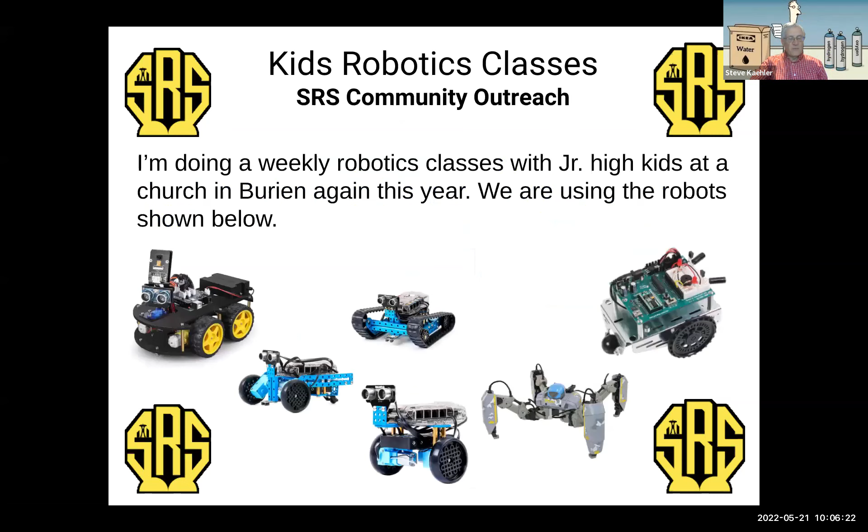Events: over the last couple of weeks there have been several. Let's see, what do they call it? DEED, Drive Electric something day. Anyway, there's events going on all over the country, and there were a number of them going on here locally. There's also some more coming up in the fall. Last week of September, I believe, is the official National Drive Electric Week. So there'll be some more stuff then. And there may also be some First Washington robotics events if you're interested in those.

Online presenters, I'm actually doing pretty good. I sent out a whole boatload of invites last night, and got through about half of my list, so I'm going to do some more of those. So we're starting to fill out the rest of this year, and then hopefully into next year.

This is what's coming up this year, and so the August meeting may be a facilitated discussion, or if a presenter actually wants that slot, I will relinquish that. But I'm kind of planning on having a presentation of some sort then. And then October on is open, and so we're planning on filling up as many of those as possible into next year.

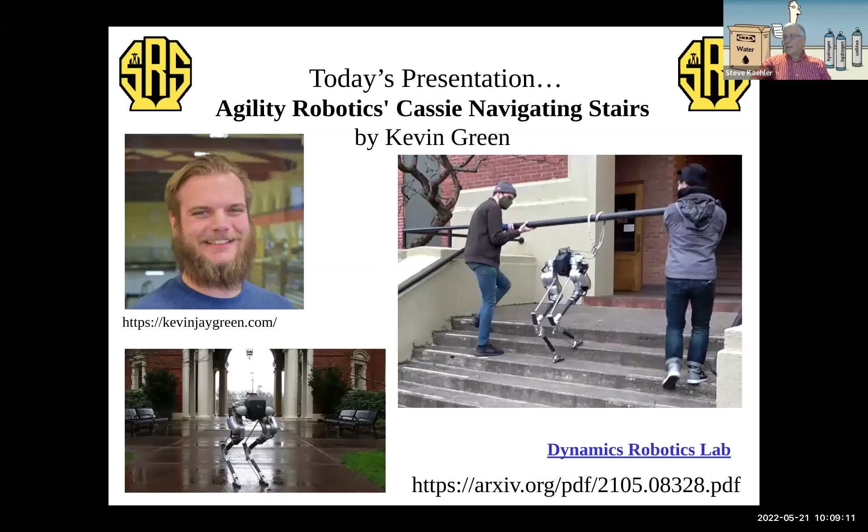Kevin Green is going to be sharing with us stuff he's been doing with walking robots, and this particular picture here, I believe, is Cassie. And there's some pretty cool stuff down there at Oregon State University. Is that right? Give me a thumbs up there, Kevin. I think so. And so we will get to those a little bit later.

Let's see. Am I seeing? Kind of curious. I'm looking for the screens to update here, and I'm not actually seeing a whole lot of activity. So I'm hoping you guys are all getting that. Yes, Steve, we're seeing the Robothon committee page. Okay, and you're hearing me okay, right? Yep. Okay. Actually, you know what I know it probably is. My wife is on a Zoom conference, a one-way thing with a ton of people downstairs at the same time. So I have a feeling that she's probably limiting my bandwidth here. Anyway, okay. Well, I will continue. Thank you so much for the feedback there.

Lloyd, would you like to share a little bit about Robothon stuff coming this year? Yep. So basically, I think we've already announced this. We will not be having an in-person event this year. We're still looking at next year. We'll see how that goes. It's kind of just play it by ear with COVID. We do have another virtual Robothon exhibition coming up, and we're shooting for August 27th from 12 p.m. to 3 p.m. This will basically be like we did before. We're going to have a collection of people presenting short presentations of whatever they would like.

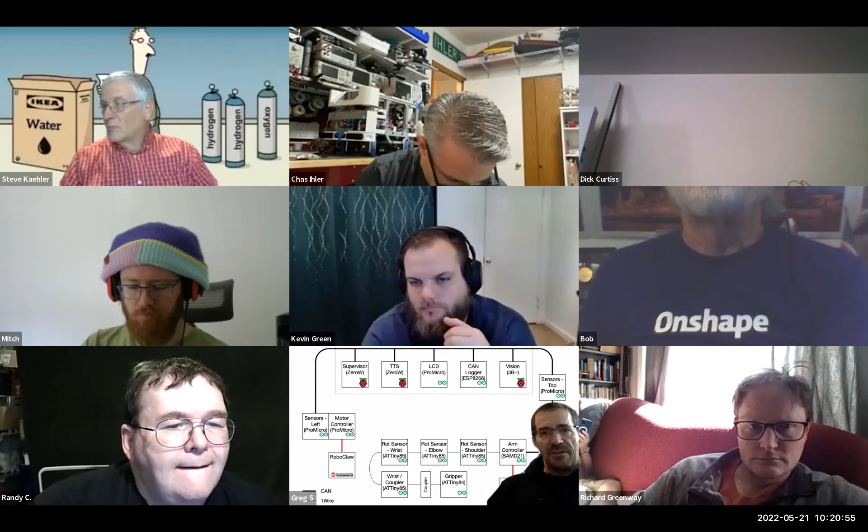Here, unmute. So I put this diagram together. This shows all of the microcomputers and microcontrollers that are in Gidget at this point, or plan to be in Gidget. Up at the top here, these are all the ones that are in the RoboBus card. Then there's others that are connected to the CAN network. And I put this together in part because I've added a few more in the arm.

So the controller for the arm is a two-board combination, one that drives the stepper motors and one that is kind of the brains of the arm. And then there's a number of boards, microcontrollers in the arm at each of the joints. There's one up at the wrist that controls a couple things, has a couple sensors on it. And then each of the end effectors, the gripper, for example, will have a controller on it.

So the fat black line is CAN. So all of those communicate over CAN. There's a couple instances where UART connections are used. And then the thin black line is Dallas one wire. That's allowing the arm controller to query the different sensors in the arm.

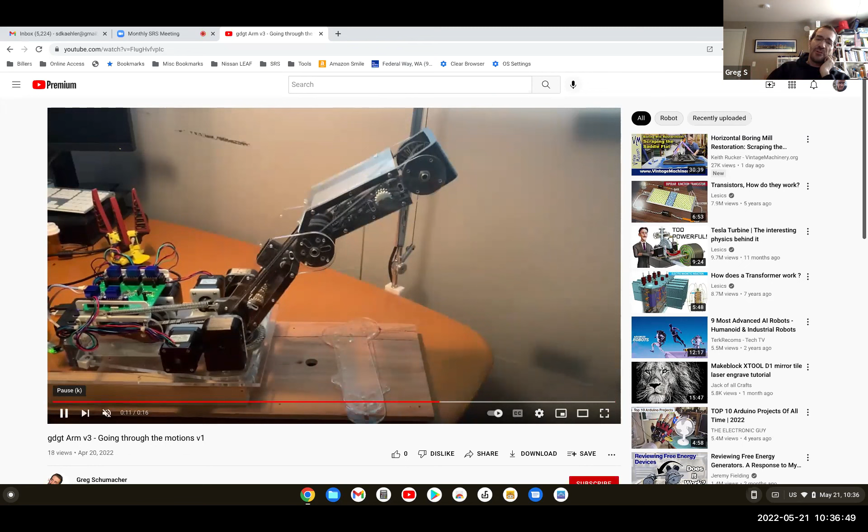Yeah. So this video is just exercising the arm, just having it go through some motions. It does have acceleration and deceleration there. And it's set up so that it calculates the motion; there's a destination angle for each of the joints. And so then it calculates the steps required by each of the motors to get there, and then determines which one's going to take the longest, and then scales the speed on all the others so that all of the motors stop at roughly the same time.

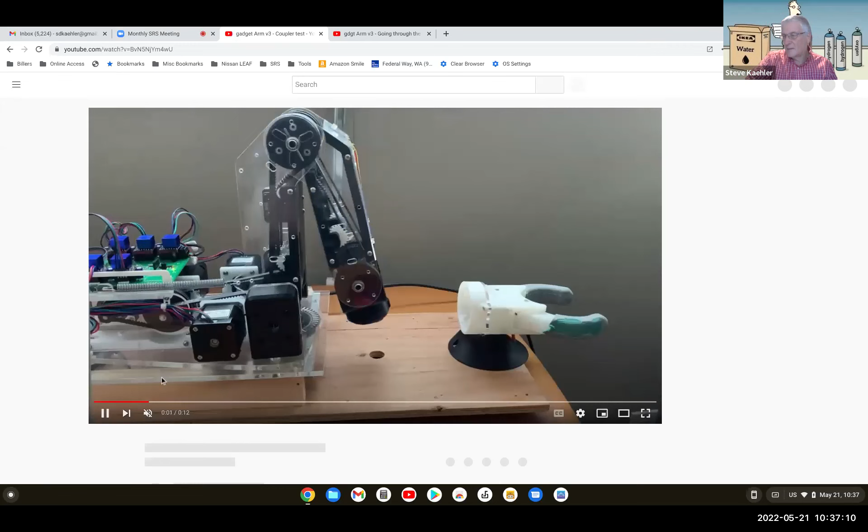Okay. And then this one. And so this one is showing it's going out, it's able to couple and pick up the tool and then detach and pull back. I cheated a little bit there in that it's not engaging the lock pin because I don't have the solenoid being driven. The solenoid wasn't hooked up to anything at that point. So I didn't try to move it around after it picked it up for fear that the gripper would fall off.

And it's got a differential wrist. I thought factoring in the rotation of the wrist was going to be a real challenge. Turned out to be very simple to factor that in to the motion calculations. Cool.

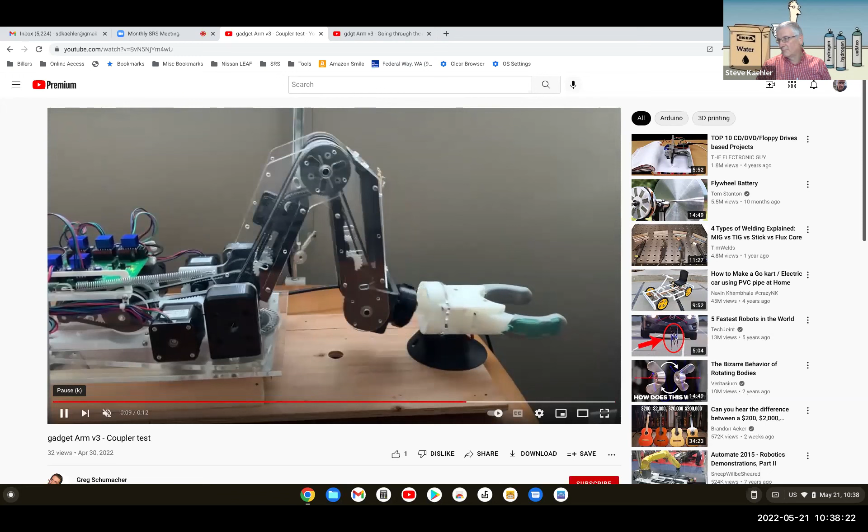Very nice. Now, all of that was done by me through trial and error, figuring out what each angle needed to be at each waypoint, right? So it moves so that the coupler is in front of the tool, then it moves it in, and then it rotates, and then it picks it up. So at each of those stops, I would, through trial and error, just keep moving the arm by commanding each joint to go to a certain number of degrees. Once I got it to the point I wanted, I'd write those degrees down, then go to the next one

and so on. And then in the code, there's a little motion queue where I'm able to put in, okay, go to these degrees, and then go to these degrees and so on. Ultimately, that's not how the robot's going to be moving it, but that was where I was at that point. Okay. All right. Thank you, Greg. Yep.

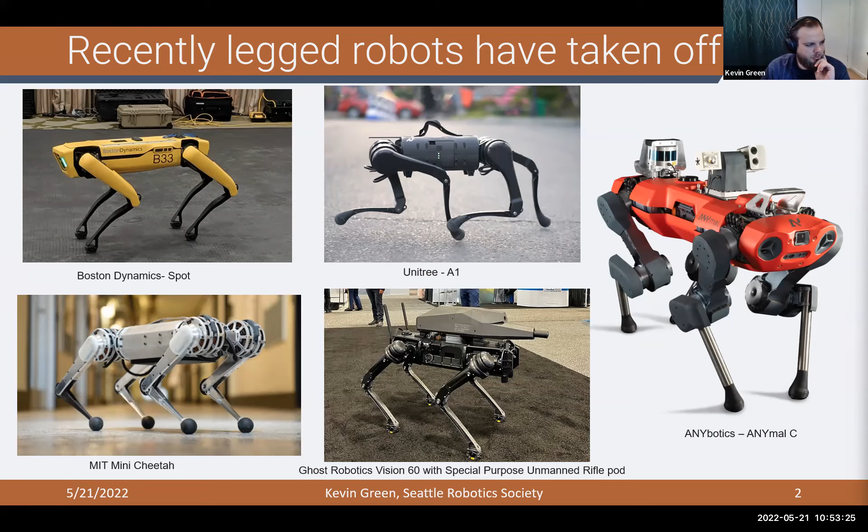So there's a lot of stuff in the quadrupeds, and those are really getting out in the real world, which is really exciting. We also have quite a few dynamic bipeds that are out there now. So starting on the left, we got Apptronik. That's a University of Texas startup, was where they came out of.

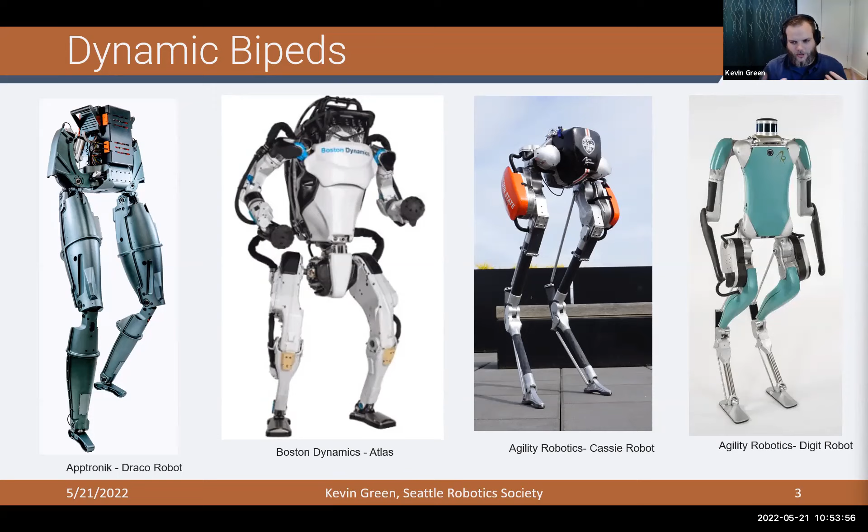Boston Dynamics Atlas is sort of one of the most well-known, between dancing and just absolutely athletic feats. And then there's the two Agility Robotics. So in the middle, that's the Cassie robot. That's actually ours. That's the one I work with quite a bit. And then there's sort of the evolution of it, the Digit robot, which is basically just the Cassie legs with upper bodies and perception stacks.

So this is backing up. Legs are really hard. Why would we even want to do this, right? Wheels are much, much easier. They're much, much more efficient, right? Cars go way farther on way less energy. And the idea is really that we have rough terrain, or we have stairs, or we design the entire world around bipedal locomotion, right? The entire world is designed so humans can get around. So it's really natural. If we can do that, it would make a lot of sense.

And they can be pretty efficient, right? Humans are actually quite energy efficient in the large scheme of things. And when you do locomotion well, it can be quite efficient. Granted, bicycles would blow humans out of the water, but legs are actually pretty good. And the other thing, they're just awesome. They are really cool. I feel like it's one of the tenets of really awesome robots moving around the world fluidly, and legs really fit in there in a strong way.

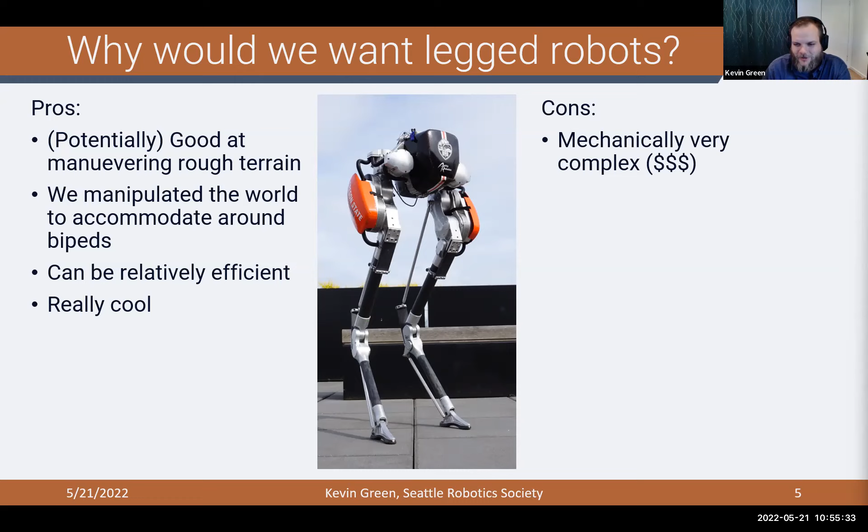But there are a lot of problems with them, which is why you don't see them everywhere. They're really complex, and that means they are expensive. There aren't really cheap, high-performance legged robots, at least maybe not yet. They're much more difficult to plan and control compared to a wheel or a tread robot. And then you have this problem that when you're moving well, you are unstable. If you stop, you're falling over. You need to actively be balancing as you move, even with quadrupeds as they get to their more efficient and agile gaits.

And then you also do have a lower top speed. That is a limitation, right? Wheeled robots, you can get up to highway speeds, or quadcopters, you see them accelerating to 200 kilometers an hour out of nowhere with some of these really high speed ones. But legged robots, especially general purpose ones, 10 miles an hour would be amazing, that's getting really pretty quick.

So, and the other thing is... I have a question for you, Kevin. The direction that the knees bend, forward versus backward, are you going to address that later on? Yeah. In the first main section, I'm going to go through the whole hardware and software stacks and talk a bit about the kinematics and why they're done that way.

Okay, thank you. And the other is that honestly, this is a bigger thing as these companies try to deploy these. The social interaction with these is very different compared to a self-driving car or one of these 6-wheel delivery robots. I think it's a really interesting area that we haven't looked into quite enough, but it's going to be super important in the coming 5 years or so.

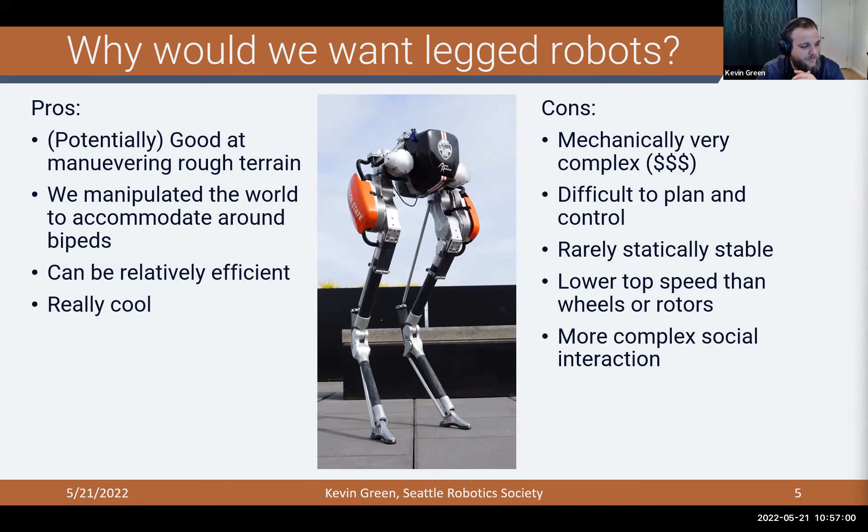So the rough outline I want to talk about today, I might skip over some of these to get to the more exciting parts. Starting with going over the hardware and software stacks we use, talk a bit about reinforcement learning. I have 3 examples of different reinforcement learning things we've done. The very first one we did, walking like a spring, and then how we actually scaled stairs with vision. And then I have 2 or 3 really interesting failure stories of bugs or issues we ran into. And with one of them I'll try to give you guys a brain teaser.

So talking a bit about the hardware and software, I think this group will find this pretty interesting. Yeah, so here's our Cassie robot. So it is a biped, right? You can see that. And there are 10 motors. And here's the leg mechanism.

So it's actually this closed kinematic loop. So if you think about it, it really is a parallel 4-bar linkage is what's going on with this leg mechanism. So I can label real quick the motors. So you have in the sagittal plane, starting from, let's go the bottom up. Where's my pointer?

Here we go. So down here, there's a linkage here that drives the foot, and that allows us to shift the center of pressure back and forth. So we have a little motor there. These are totally passive. There are no motors in this area. And then we have a knee motor here. So we call this the knee, actually.

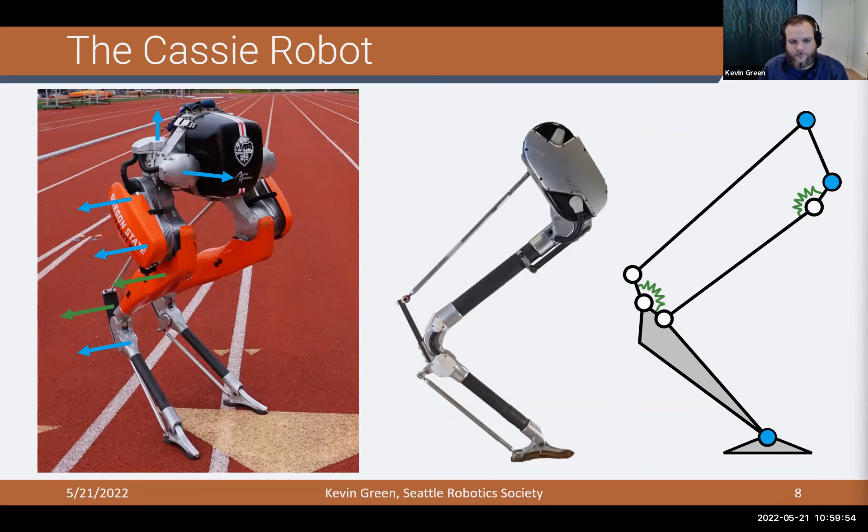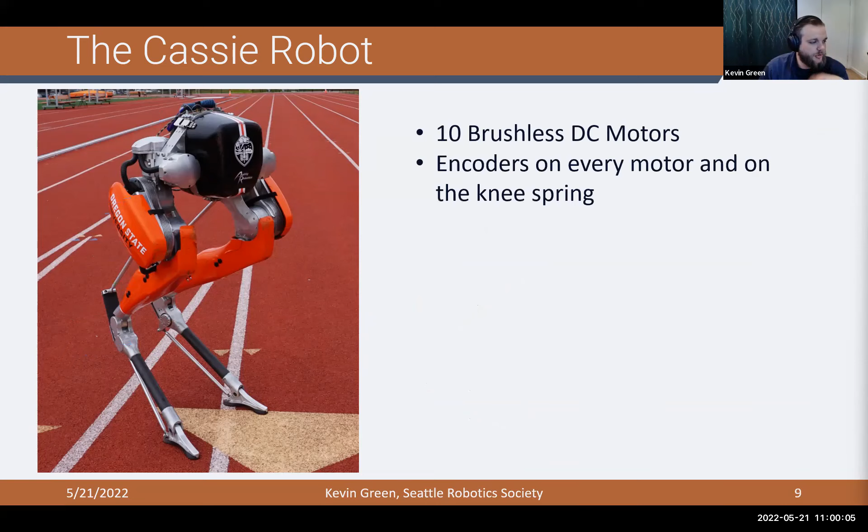Yeah, those joints. And so there's 10 brushless DC motors through this. We have encoders on each of the motors and on the knee spring, along with an IMU on the pelvis. It's powered by a custom lithium-ion battery pack running at 48 volts. And that gives us enough power to do over an hour of pretty high-speed walking on this robot.

Total weight, roughly 30 kilograms or 60 to 70 pounds. And we can get it up to about 4 meters per second, which is the equivalent of running a sub 7-minute mile if you did that for a mile continuously. And when you're running, you draw between about 50 and 100 watts.

And one thing I didn't have on notes, but the transmission designs are actually pretty interesting, is that they're really, really low gear ratios. I think that's a really important part of the mechanics of our robot. So the ones on the knee and hip here, these axes, they are only 16-to-1 gear reductions. And the idea of that is that you really want to be back drivable so that when you run across a step up or a step down or an impact with the ground, you're not going to have this giant amount of inertia and this big shock on your leg as if you had a really big gear ratio.

Yeah, see a comment there. And actually the name Cassie, it comes from cassowary, which is kind of like an ostrich or an emu or like a chicken leg, because it was designed based on sort of math of inertia properties, but it ended up being almost identical to the topology of what you see in these large flightless birds.

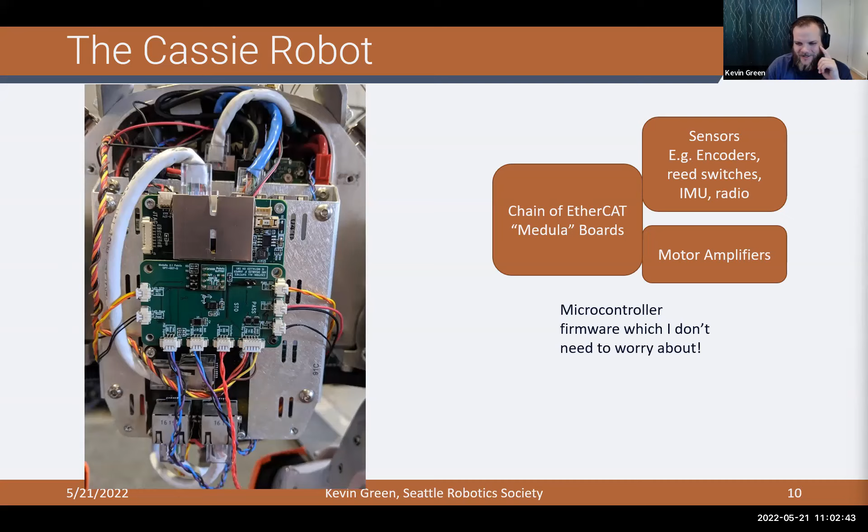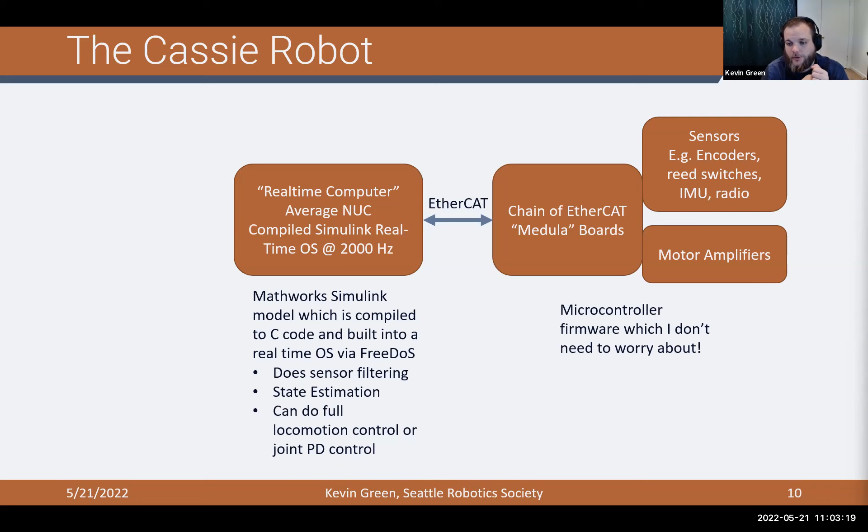Then that connects back to a real-time computer that's running a compiled Simulink Real-Time OS image. So that's a specially designed operating system to make sure it runs at 2000 Hertz, locked solid. So that does basic sensor filtering and some state estimation to give us a good estimate of the overall robot pose. And it can do some locomotion control, but for our work, we generally just have it run joint proportional-derivative (PD) controllers on each joint. And that gives us a really clean interface for what we want to do.

And you go a little bit higher up, then we have a second computer. So this is all on the robot. There's a second computer, also one of these Intel NUC-size boards, and it's running just an off-the-shelf, GUI-less Debian. So just like Ubuntu, basically. And from that, just whatever we want to run. For a lot of our learned stuff, we use just a Python script. And it truly is a Python script with some pretty efficient libraries. And in some earlier work, we were running multi-threaded C++, some more intense optimization-based things.

So yeah, the communication protocol on the Ethernet. This is just custom UDP messages. Pretty standard. So TCP/IP is one option. UDP is just a much simpler one. And when it's just going from one computer to another, that gets us a lot of the way there between the real-time and the user computer.

And so EtherCAT is its own protocol. It really is a lot like CAN, but it uses a lot of the wrappers of Ethernet and some of the other protocols. It's very common, I think, in industrial settings. It's a little weird to see it in this context, just because usually you connect whole arms to each other for a whole assembly line. That's where it's most commonly used. But it has some really nice properties and really, really low latency when it goes from one board to the next, and each board will populate its data on that message structure. It's really quite nice.

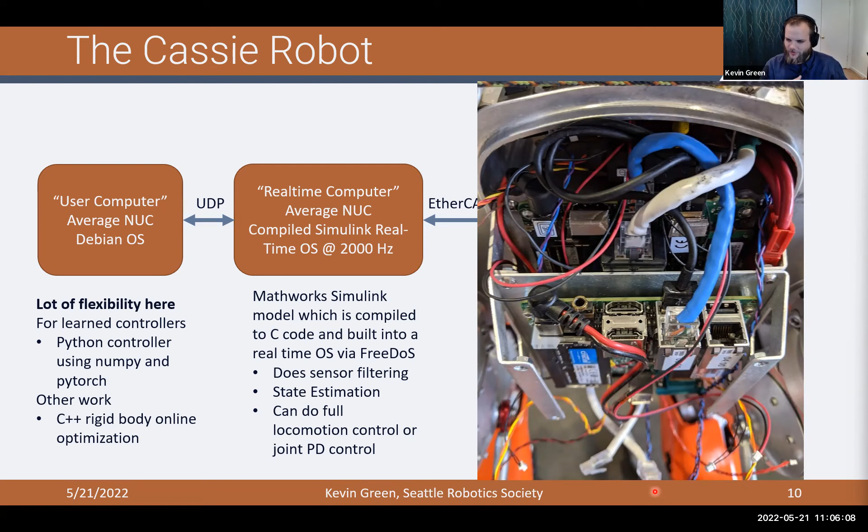But we have some more sophisticated systems above it that do the accounting for how you fail to get to where you want to go. So it has a lot to do with that internal state, because then we'd have to consider how wound up my integrator is. But great question.

And then the one other thing, we have an offline software stack. Our whole trick for what we do is we do a lot of simulation and we train a lot of controllers in simulation. So we need a really high-fidelity simulator that's quite efficient. And what we've come to use is this software called MuJoCo. It stands for Multi-Joint dynamics with Contact. And this is totally free now. It used to be paid software that was pretty expensive, which was really pretty obnoxious.

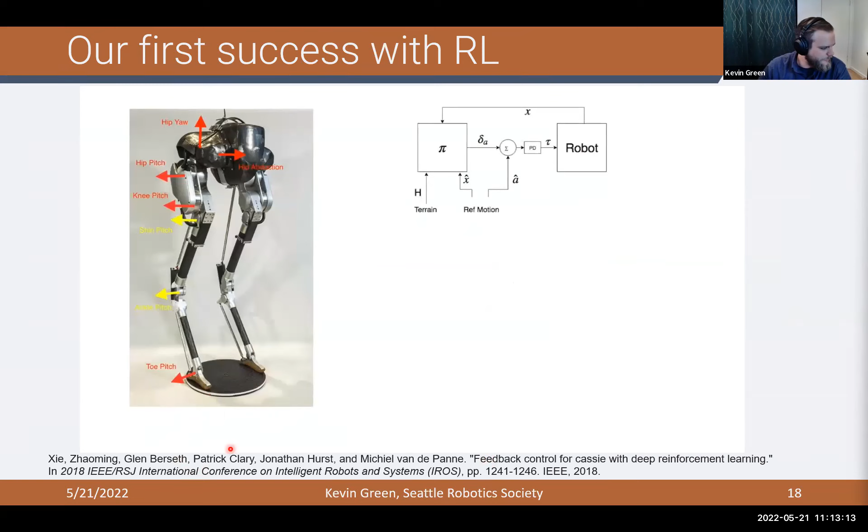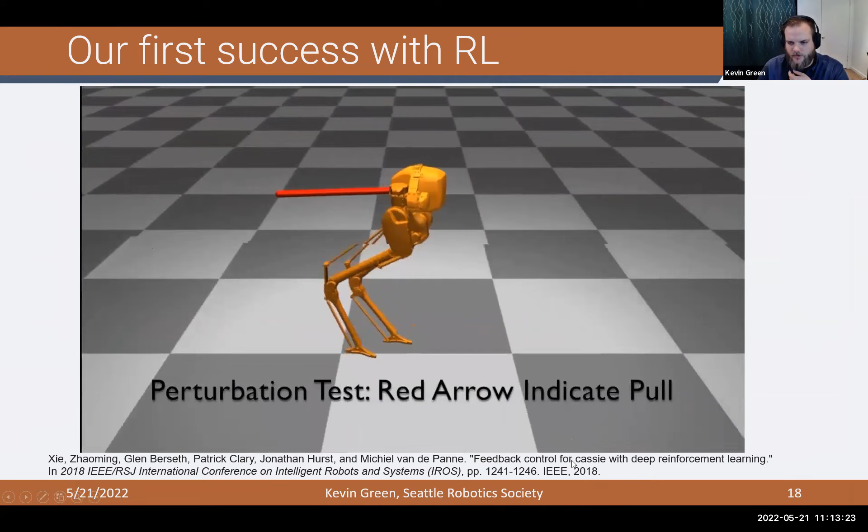So let's look a little bit at how this actually worked the first time we got this to run. So this is some work that was a little before my time, a collaboration between University of British Columbia and Oregon State. And let's see, I might jump around this video. That was good. So the whole idea of this is that we had some reference motions of the robot walking, and we used that as a big component of the reward to tell it how it should walk.

And it was able to walk on varying ground. So I was talking about, you can't expect the ground is flat because you don't have external perception. You have to be able to do well on average. So the ground here in this case, it's sort of bumps. There they messed around with some sensors, but it did pretty well.

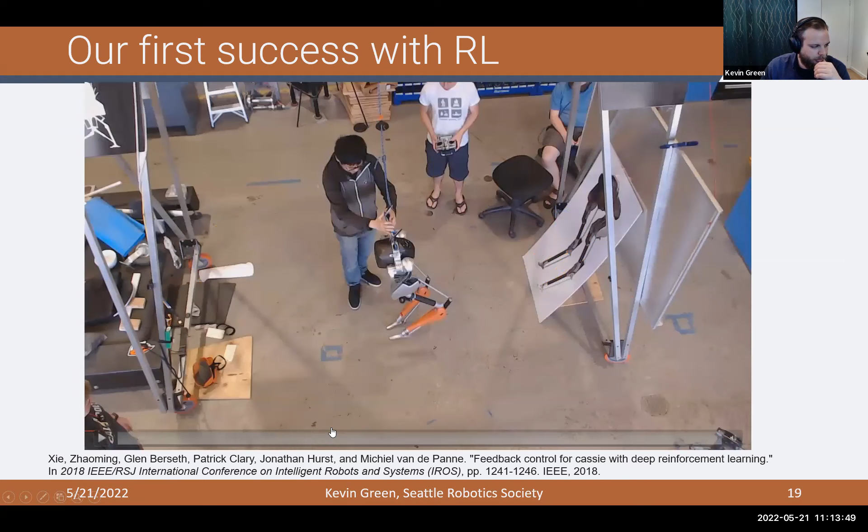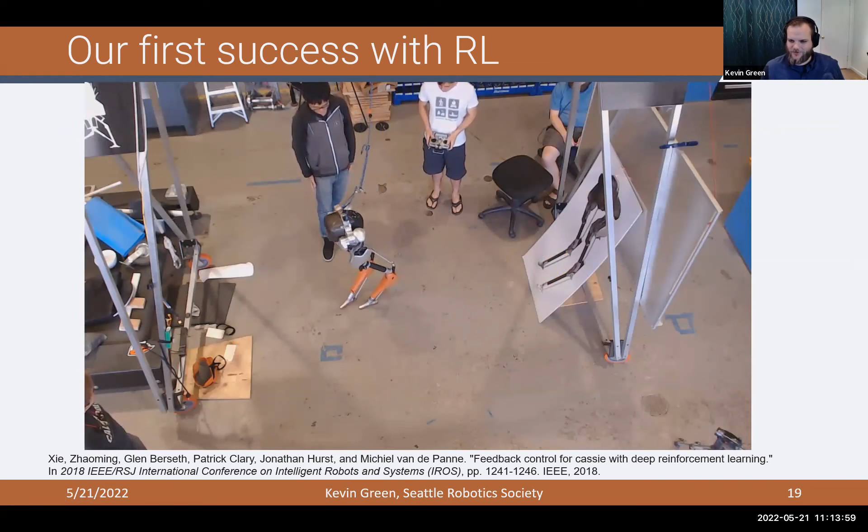But the really interesting thing was that it actually was able to work on hardware. You know, it doesn't look amazing, but at this point, creating a neural network that made the thing balance was the first time we had ever seen anything like this. So it was super exciting.

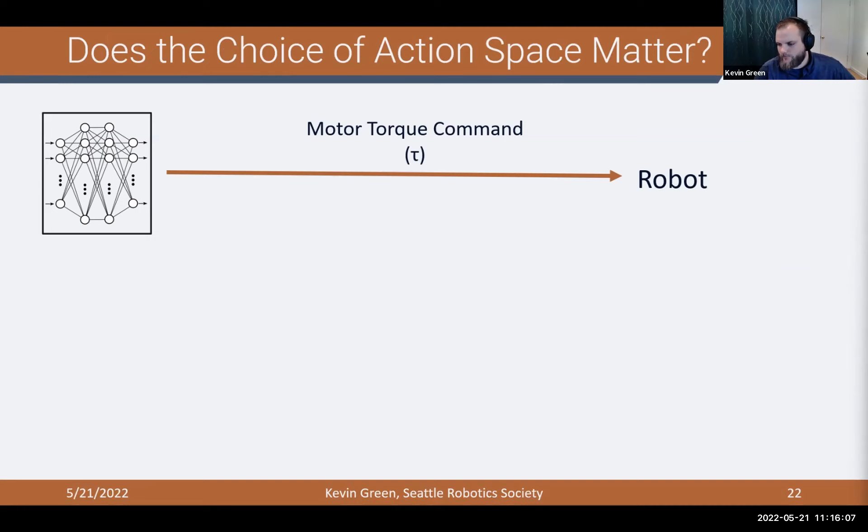Let's see. Yeah, answer some quick questions. So for varying environments, if it can't sense the environment, it can only optimize to the average, or it's sort of like a weighted average of what it sees, so you can manipulate it a little. But if it can't sense it, it has to just think about the entire average of what it sees during training. And it's able to balance while standing still. With how we parameterize some of these learned controllers, they always step because we have clocks that tell it to keep taking footsteps. Yeah. So the other thing we talked about, why PD as opposed to PID, but the real question is, why not just use motor torque directly, right?

Because you think you have a PD controller in the middle, and if your neural network's just outputting some nonsense, it could just skip that and output the motor torque directly, right? You can always invert the PD controller if you know the state. So you could do it. And the real reasoning is there's two real things I think that matter quite a bit.

One is that you run these at different rates. So the PD controller itself, we can run them at 2000 Hertz, which is basically continuous for all sorts of real world situations. But we can run our neural network much, much slower. So 40 Hertz torque control, it's going to be ugly. That would not look very good. But updating the position commands for PD control at 40 Hertz is actually somewhat reasonable.

And the other thing is, if you imagine what would a constant command look like, because a constant thing is easier to learn than a super varying reactive one. A constant PD command is going to be roughly stable, and you can get a lot of different locations of, say, a single joint with a constant position command. If you give it a constant torque command, you're probably going to run into a joint limit if you leave it for long enough, because it's just going to diverge. If it's not strong enough to hold up the weight, it'll fall down. If it's too strong, it'll run into its other limit.

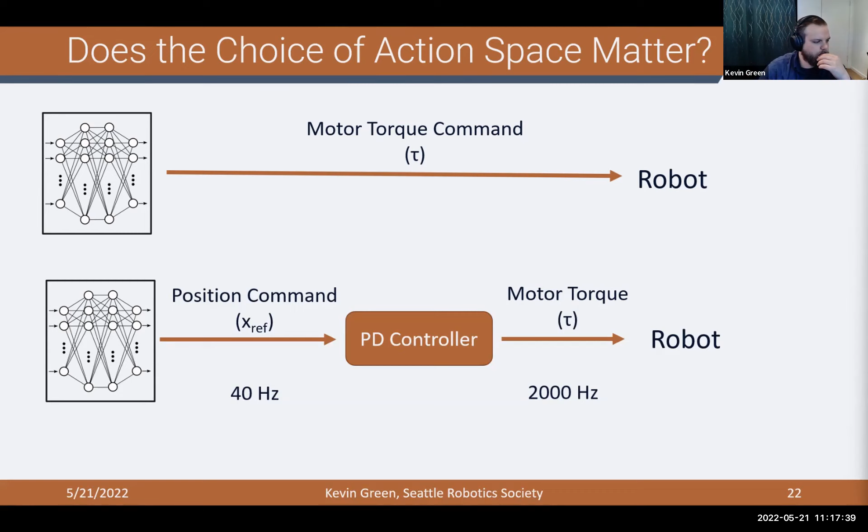Because your legs apply forces to the ground, and the sum of those forces will tell you how your center of mass moves. And so if we think a lot about what should the center of mass do, we can not worry about all the complexities of our leg mechanics within reason, and that's a really compact way of describing a gait. And in some more classic legged locomotion things, you can model how humans walk pretty accurately with the center of mass, so a mass and a spring.

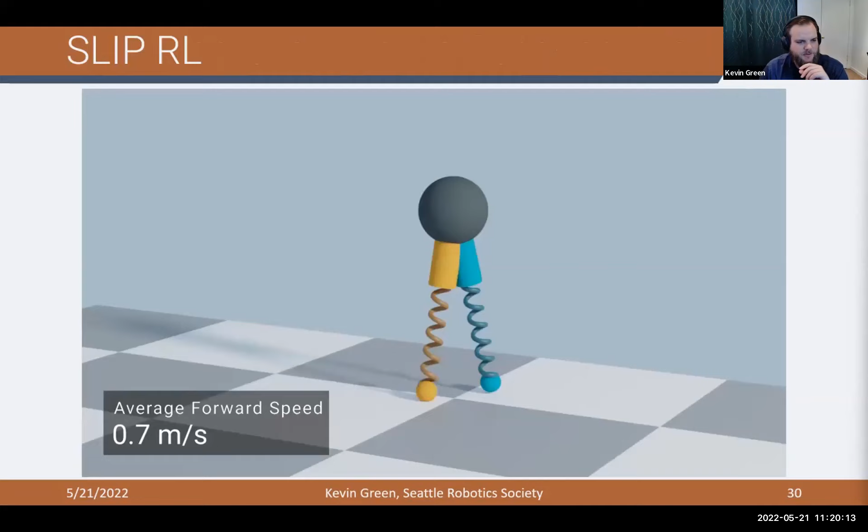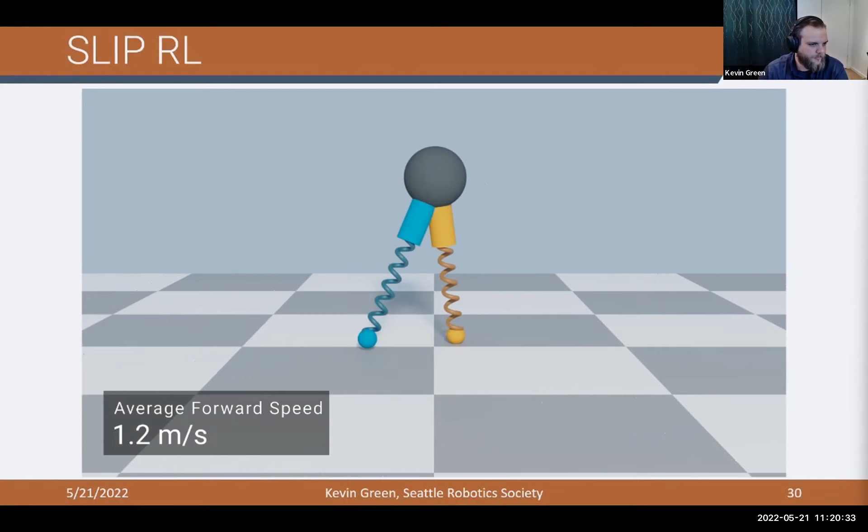So what we thought to do is, what if we optimized walking motions, just nominal steady state walking at a bunch of different speeds for this sort of model, and then use that as the reference trajectory instead of some arbitrary full order one for the robot. And this actually worked really well.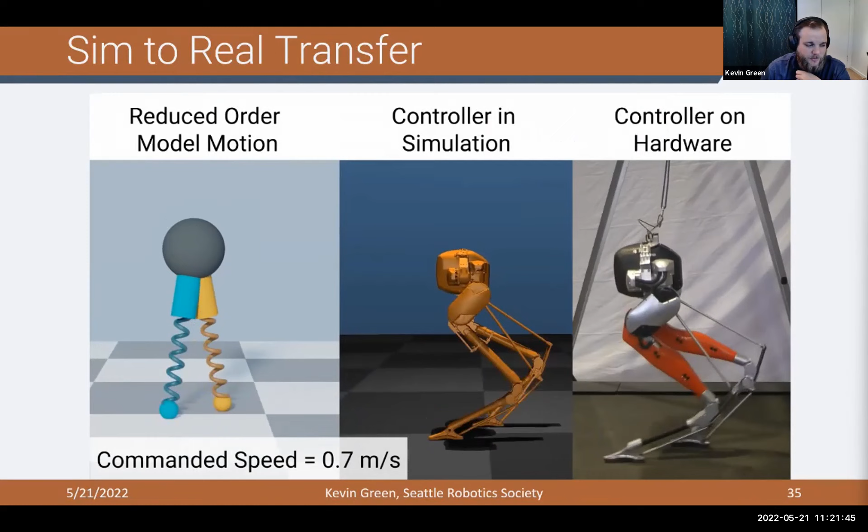And I think this is the part that really was saying to me, if you line up the reduced order model on the left, the simulated controller in the middle, and the real one on the right, we're getting a lot of that motion and the properties of the motion transferring. The body is oscillating side to side, up and down in a very similar way. Legs are moving in very similar ways. So we're definitely getting a lot of those dynamics carrying through.

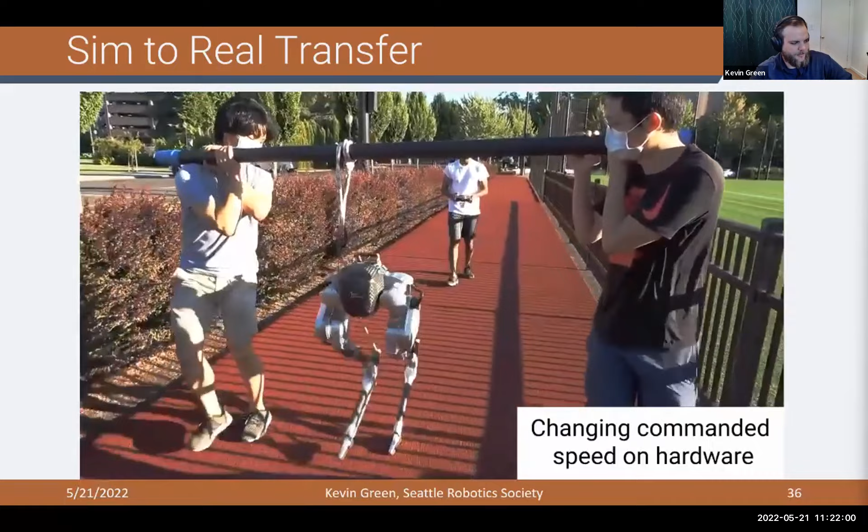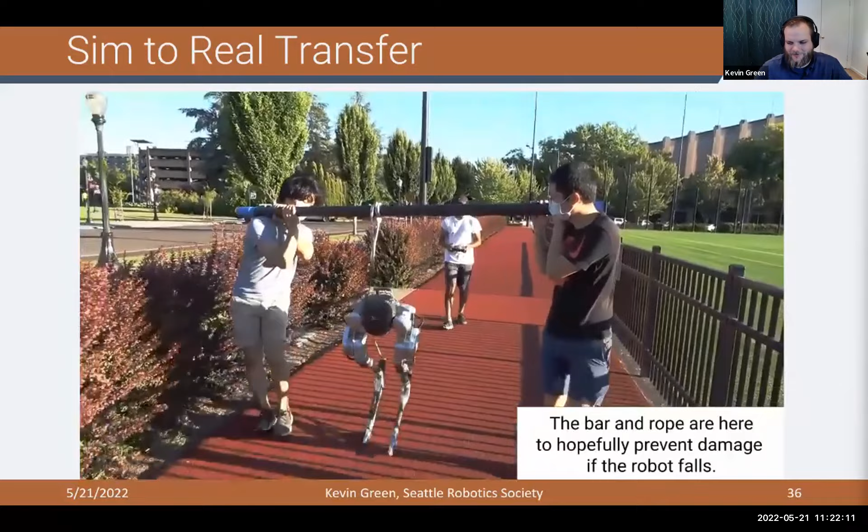And we can do the speed changes on hardware. Speeding up. So here, the shoulder poles in case it falls, so we don't absolutely destroy the robot, because even though it's pretty nice hardware and we have funding, it really slows you down when you blow up a motor or crack something. Full speed. Slowing down.

Now I want to talk a little bit about how we walk up and down stairs. So this is work led by Jonah Siekmann, who now works for Agility Robotics, along with John Warila. It's a leg day for the robot, arm day for the handlers. If you try to catch the robot when it falls, you'll definitely get an arm workout, because trying to grab 30 kilograms as it's falling over is a little bit of weight there for you.

And so what we thought is, I'm not going to go running up to stairs and start climbing them without looking at them at all. So that's kind of ridiculous to expect our robot to do that, right? So we tried to think, what's the smallest amount of information we can give this robot? Full RGB cameras, that's so much data, and big neural networks to deal with it. Let's go simple. Let's pretend we have a LiDAR or a set of time of flight sensors, and let's say we just have 6 of them fixed to the pelvis. We think that should be enough information to infer the shape of the stairs if you know they're going to be stairs. So we built that out.

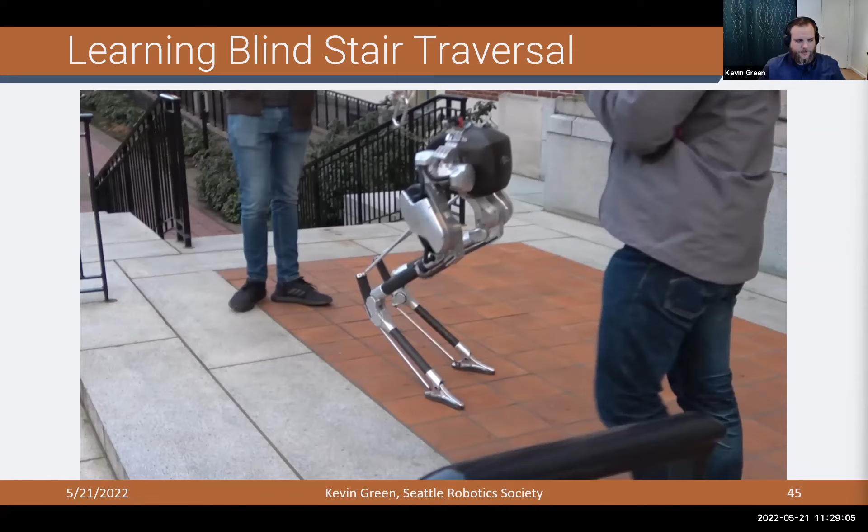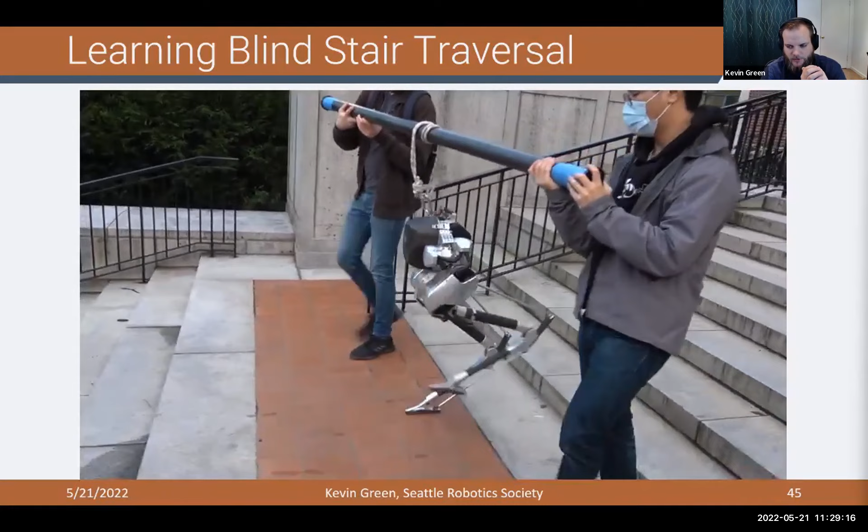So once again, no cameras, no perception at all. You have a person with a controller that's giving it velocity commands. So it says go forward at so-and-so speed, turn at so-and-so degrees per second. I'm not sure if these have lateral walking too, but some. And yeah, that's an important key point. Because it can't see the stairs, it has no way of actually lining up one foot per stair.

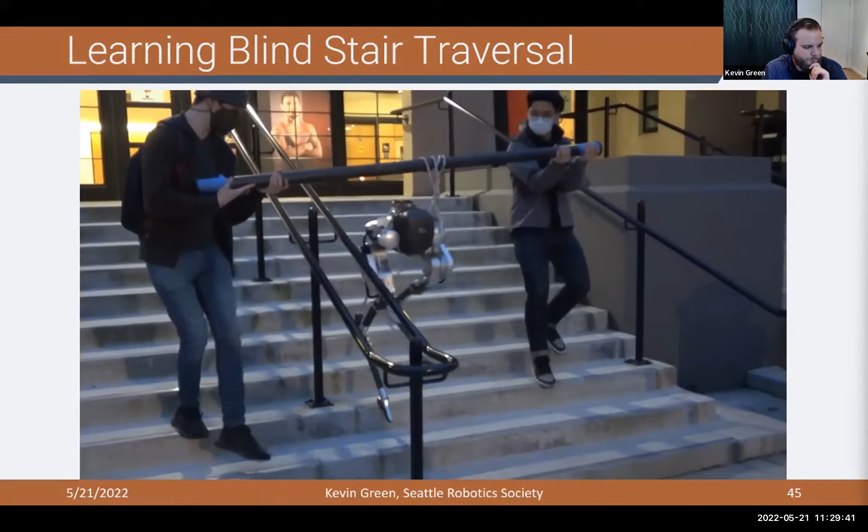So we're gonna see it a bit here. There it kind of slipped. And coming down, it's about to skip a couple stairs, just because there's no way of lining up. And yeah, it did step back. And I think I have a slow motion one right after this.

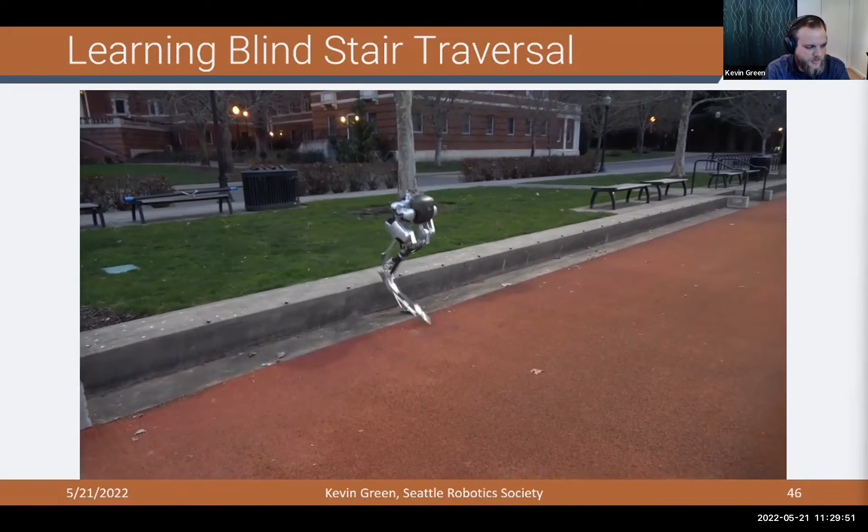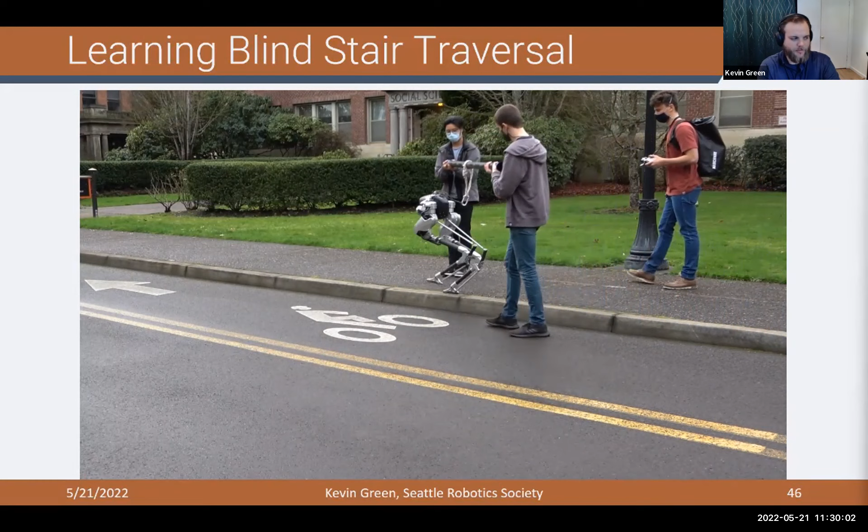And just because it's in simulation, and if it falls over in simulation, it's zero reward, it's really bad. It can learn to do things like catch itself, go back down the stairs. It'll trade off going-forward reward with staying upright. And it's really amazing, these sort of emergent behaviors just from working a lot in simulation.

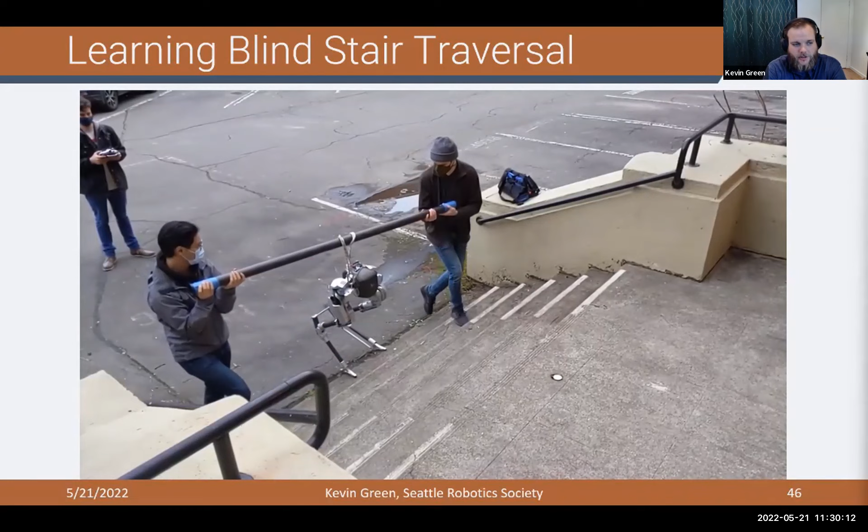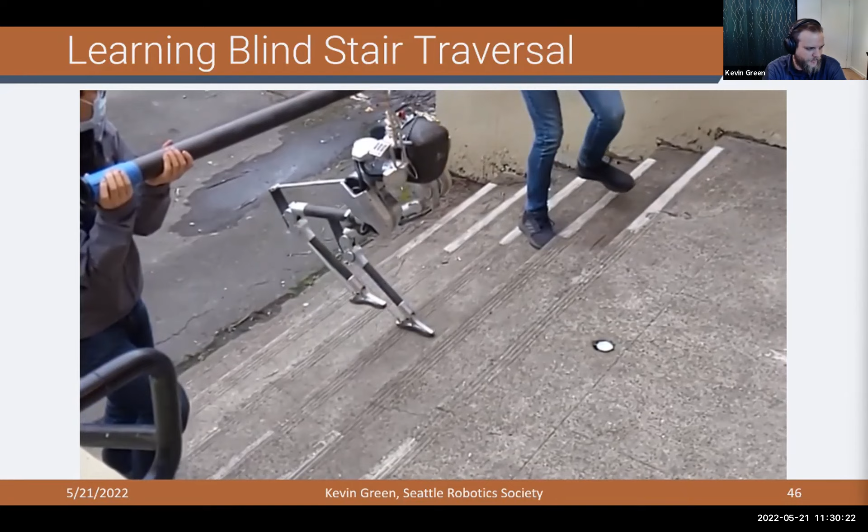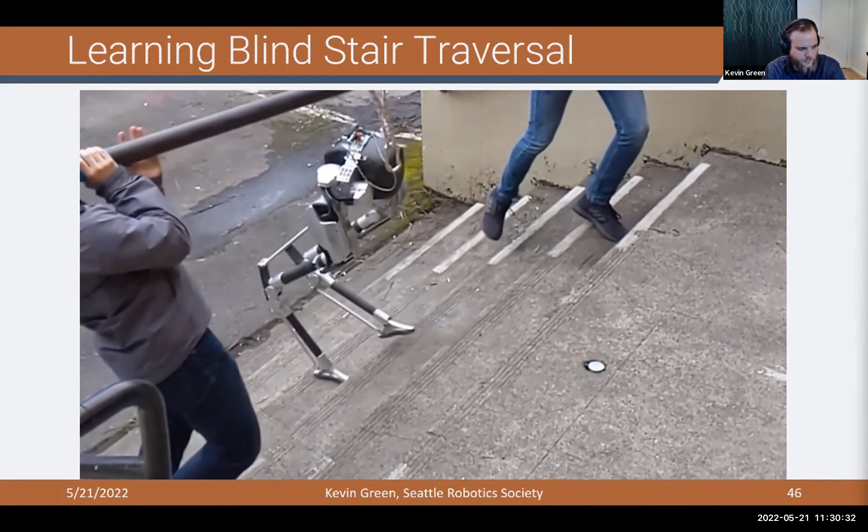So here's a really good one for the stepping backwards. So it's stepping up, gets one foot, great, one foot, great. That one, real solid. This one, it only gets to the front of the toe right there. And it tries to apply heel torque, doesn't get anything. It's not on the ground. So it steps backwards really competently, honestly. Gets its center of mass back ahead of the feet, gets that momentum going forward, and gets the rest of the way back up.

And so all of that, deciding which step to step on, is fully emergent of our neural networks, which was really pretty amazing to us to see. But one interesting question then, going back to that leg strategy, is it doing that? Is it doing this sort of leg swing behavior? And we found it actually is.

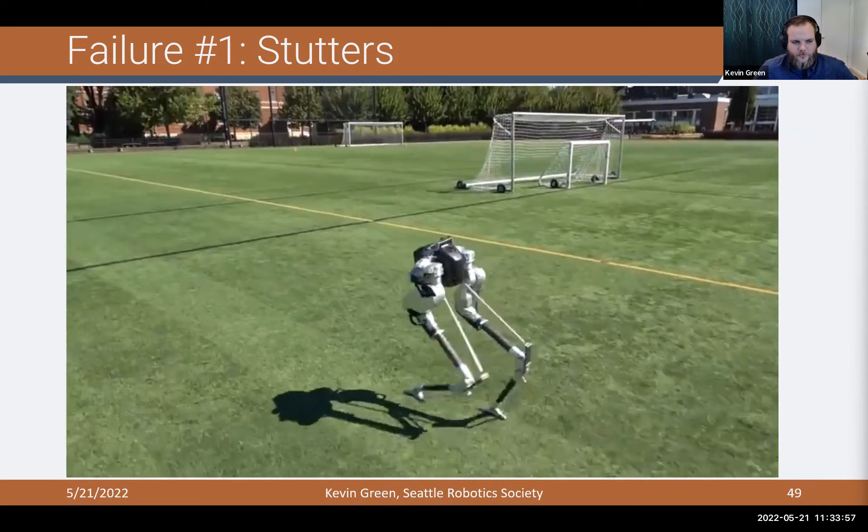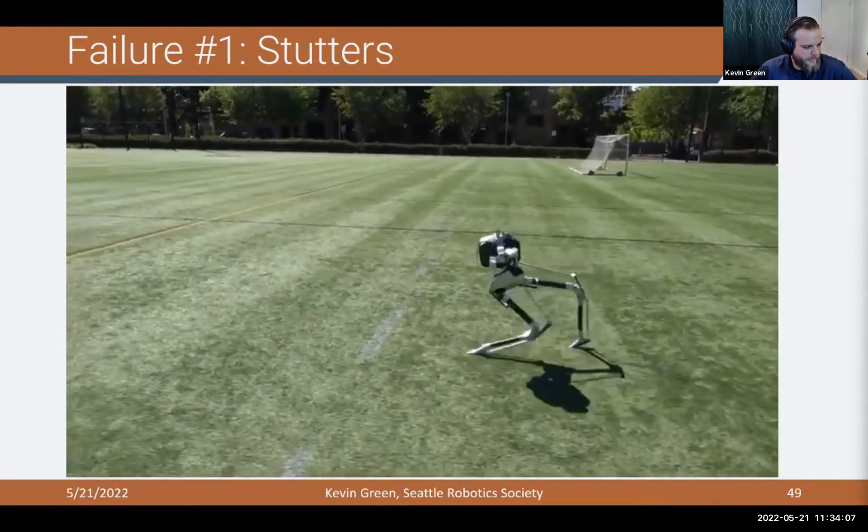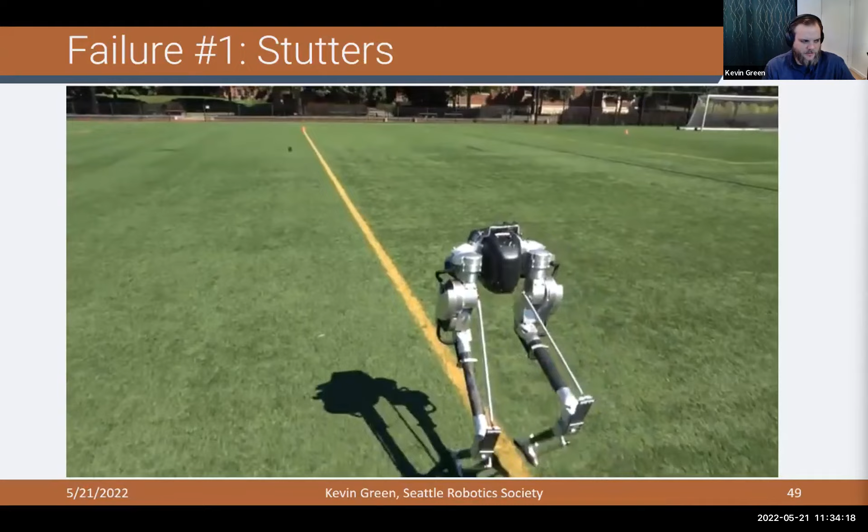Okay, so we're taking our robot out, just running it around, trying to get higher speeds, and we notice these stutters. So there'll be some slow motion of it right here, I believe, where it's running along, and it just pauses for a second, and it keeps going. And these get worse over time, so the longer we run it, the worse these get until it eventually will always fall over. So it starts off great, you get them, they're pretty evenly spaced. Okay, so we got a guess, not quite.

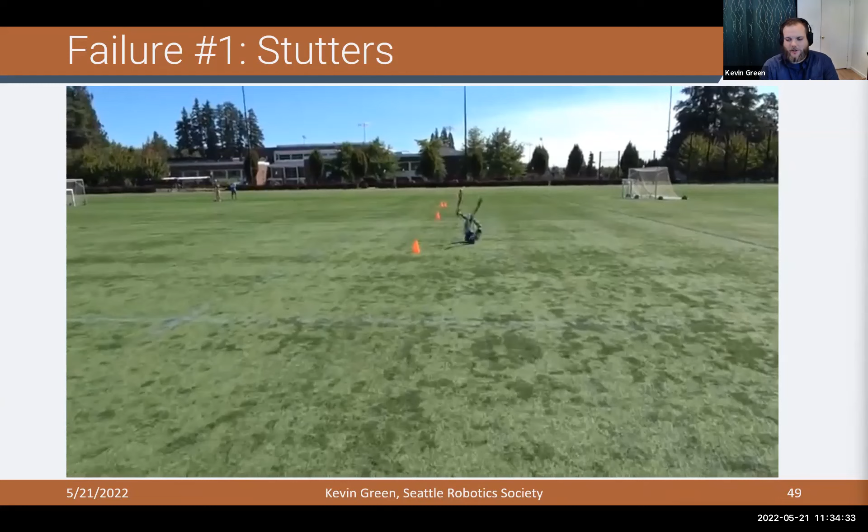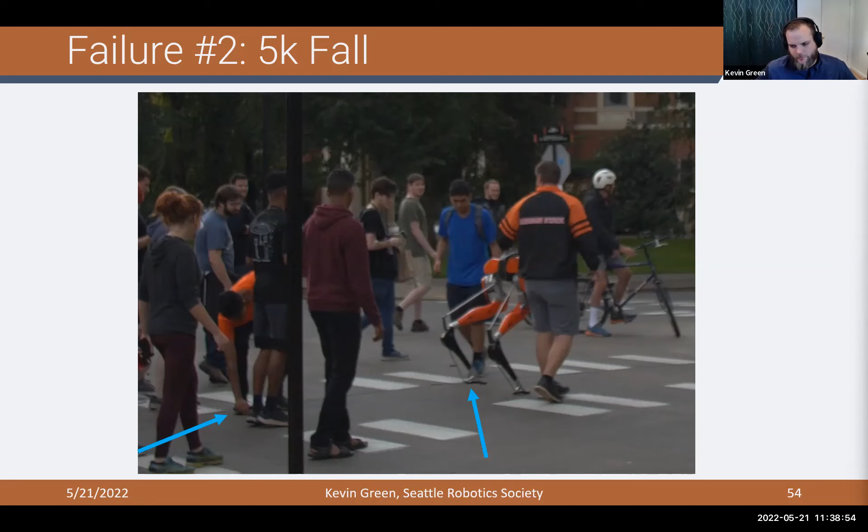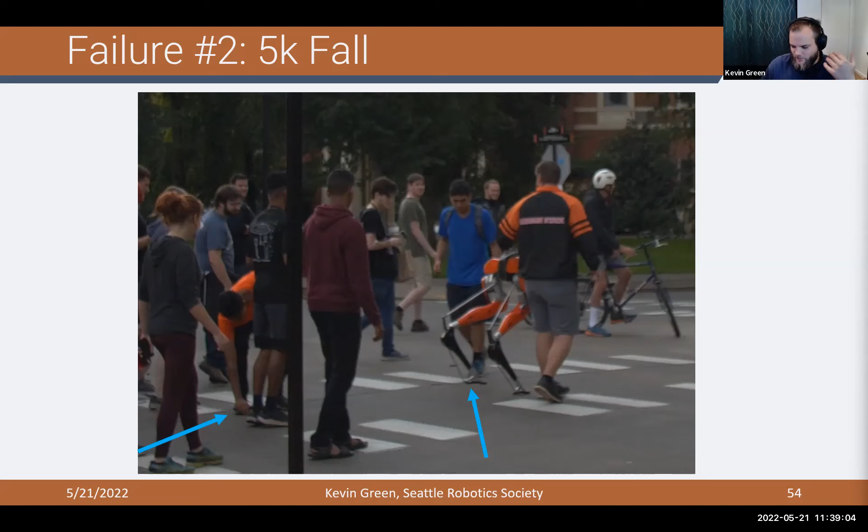We tried to shut it off, restarted it, nothing. Couldn't get any signs of life. You know, it beeped or whatever, but it wouldn't actually post. So we took it back to the lab and we're like, what the heck? We started tearing things apart, part by part, and we found the failure. So this is inside one of those NUCs. And if you see in there something that really doesn't belong, let me switch back from video to slightly better.

So if you look in there, we have a nut that fell onto the RAM module. And so this is a nut that was holding in a fan. And the lesson here is use Nyloc. It'll save you so much pain in the end.

And the amazing thing is the computer was absolutely fine. I don't know how, very rarely in my experience are you able to short pins and get away with it, but we were able to pull it off. I put it back on the test bench, ran a bunch of benchmarks, and it worked just fine. So count my lucky stars on that.

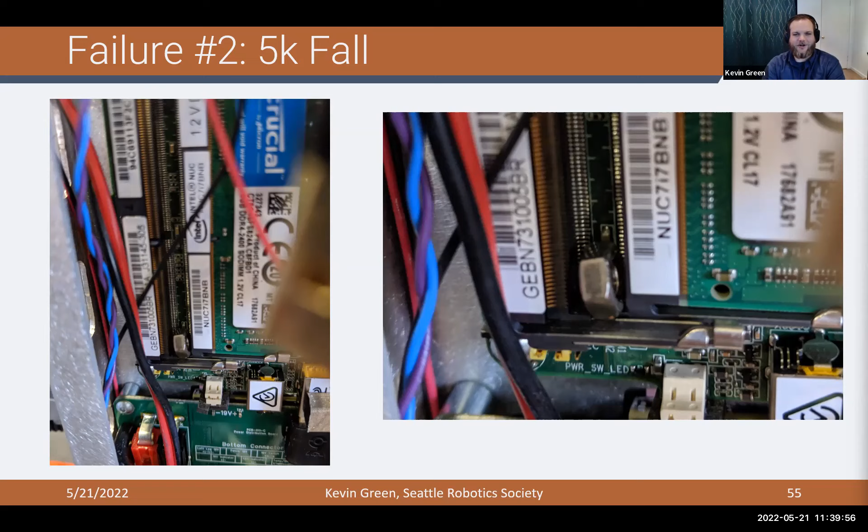All right. And then the third and last one I want to talk about here is this idea of impacts.

So as you're walking, you slam your feet against the ground quite a bit. And if you want to figure out what's the best way to do it, I want to do it such that I have the lowest actual impact. So the actual impulse I feel, lower is probably better. It'll damage my robot less.

And so if you think of where to apply an impact, if you land with a flat foot, you're basically going to apply it right to that center. But if you apply it to the heel or the toe, you think you should do a little better, right? That's why when a human runs, you want to strike with the toe and the balls of your feet so that you have more joints to absorb the impulse, as opposed to heel striking, it'll go right up your shin. So we generally walk with a flat foot touchdown with our robot.

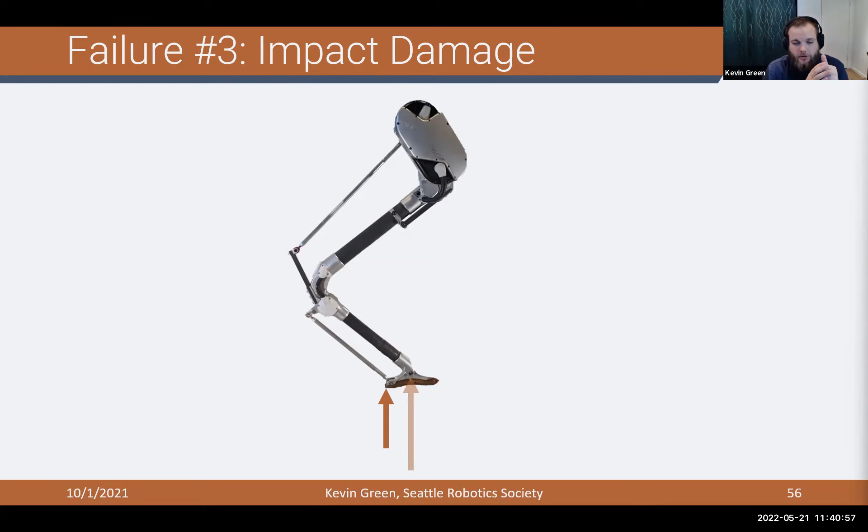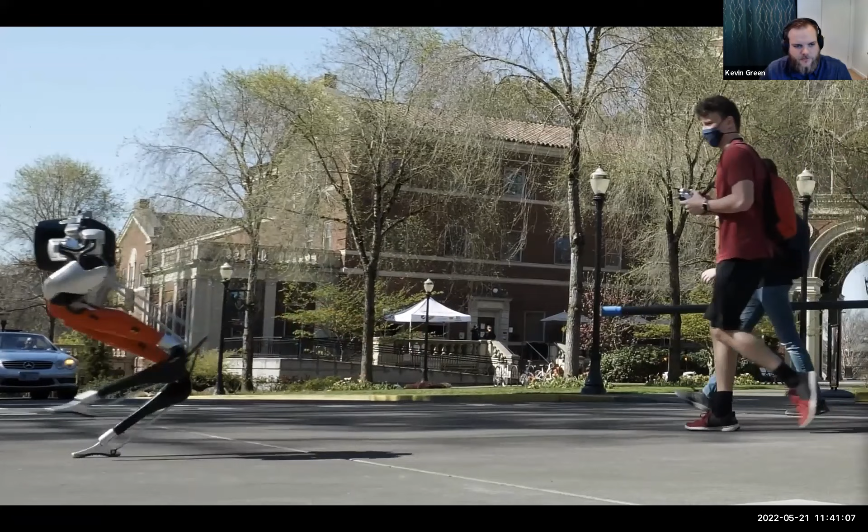So we thought, okay, let's try heel striking, right? Then we can hopefully reduce the impact. You can run sort of the rigid body math and it should work. And we tried that. And here's a policy that heel strikes. Let me switch back to the optimize for video. So here, hope you can see that. You see it's striking pretty clear at the heel of the foot each time. But it turns out that was a really, really bad idea.

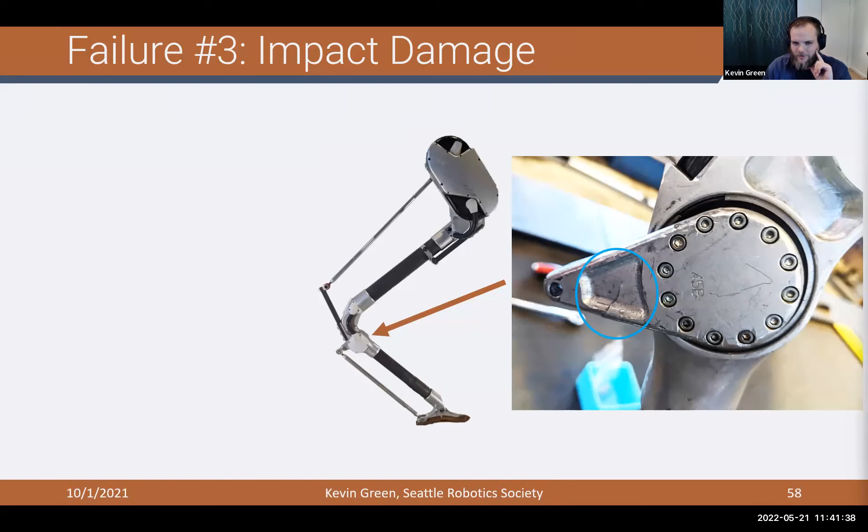And the reasoning is, it's not just how big is the impact, it's where's that impact going. And on our robot, that foot actuation is not very compliant. So we see here, we cracked the crank that was driving the foot using that policy. Then we also sheared this rod completely off and wore this foot away through the rubber down to the aluminum, which, I mean, we break rods occasionally, but this was all in one day's trial using that policy. It was not very good.

So it's kind of interesting that even though the math, you can do all the math you want, you can simulate it all you want. If your robot isn't designed around that, you're going to have problems. So there's a lot more complexity to hardware than a simulator will tell you, or than what the fancy correct math tells you. So there's a lot of things to interact, I guess, in getting to that.